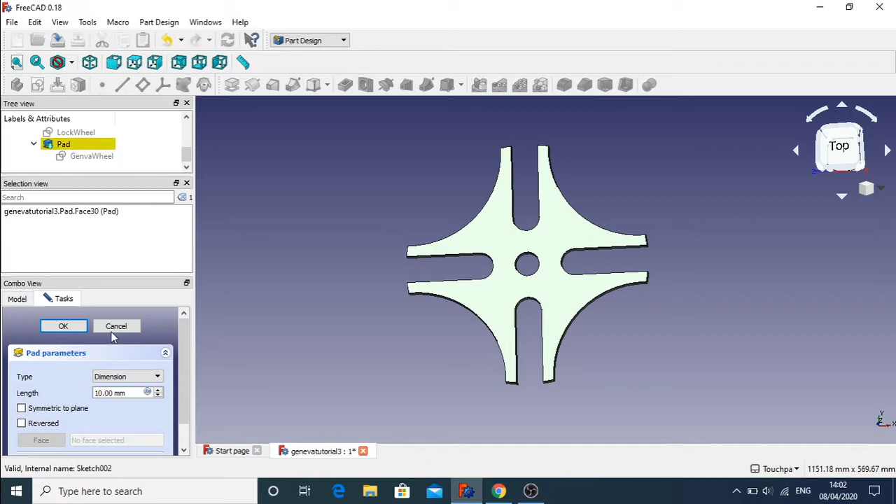To do this, we need to come out of the padding, so we cancel off our padding and jump into our Geneva Wheel sketch, which is part of the padding. We can see this is all complete now. So our lock wheel will actually sit here, and surrounding it will be the pinwheel. So let's jump to our lock wheel.

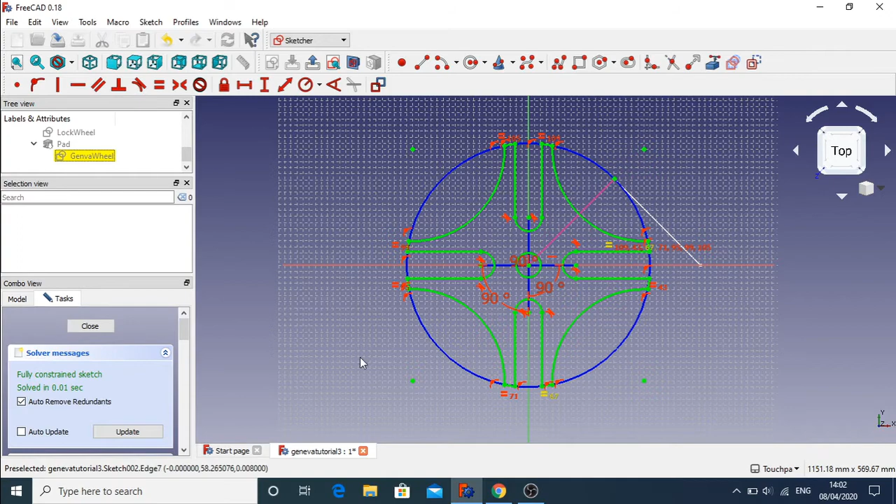What I want to do is make the Geneva Wheel, the actual Maltese cross, visible itself. So we right click on the Geneva Wheel and toggle visibility. We can see these are sitting together with each other now.

First thing I'm going to do is hide some of these constraints on the screen so we can see what we're doing. Let's put down to constraints and we'll just make those invisible. Now we've got a nice clean model on the screen. We can see our guides behind, our lock wheel and our Geneva wheel. So now I'm going to create a new sketch and make the pinwheel.

And I'm going to exit the sketcher. Now the lock wheel has become invisible again, so I'm going to right click, click on there, go to my model and look at visibility, and set that one to true.

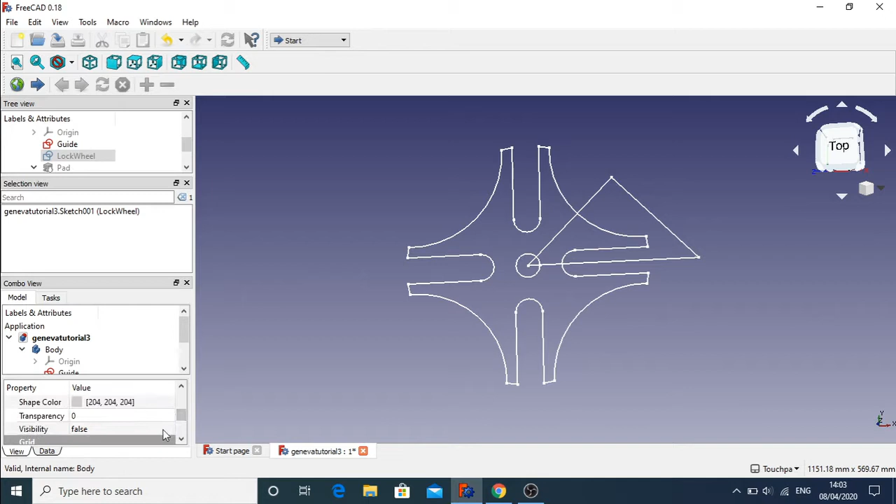Jump back into the part designer, and I am going to make sure that I'm actually within the body. Click on the body, there we go, click on the body and then create sketch. And this is what I'm looking for. So XY plane, click OK.

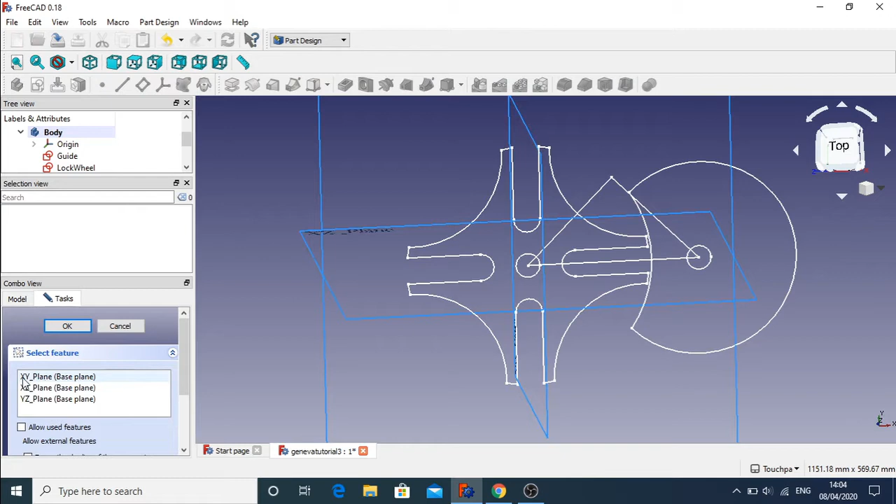So now we've got a new sketch going. You can see down here sketch 003. And I am going to rename this as pinwheel.

And I'm going to create a circle on here. Now my circle's got to be 200mm wide, which was the same size as the Geneva Wheel or Maltese cross. For the time being, I'm calling this the Maltese cross.

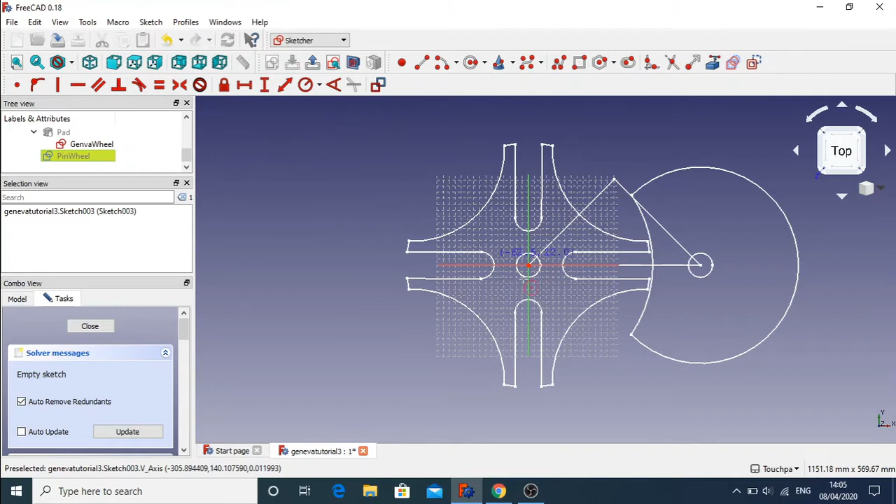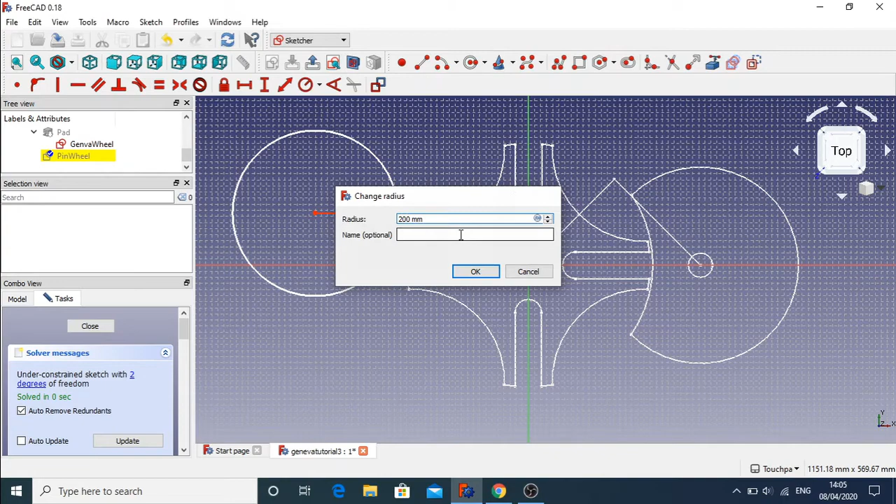So create our circle, and then click on the circle and go to constrain an arc or a circle. And we can change the radius of this to 200mm.

And I'm going to pull this over to the center, or close to the center, and I'm going to click on the create an edge link to external geometry, and I'm going to bring in the side of my triangle that you see here, my guide triangle. So I'm going to bring this in, and that will bring in this point that I can constrain this geometry to. Hit escape. We'll just move our circle into place, click on the 2 points, making sure 2 vertices are selected here.

And hit the constraint point tool here. So that's constrained to the center, and now we've got the circle sitting there. So this is part of our pinwheel.

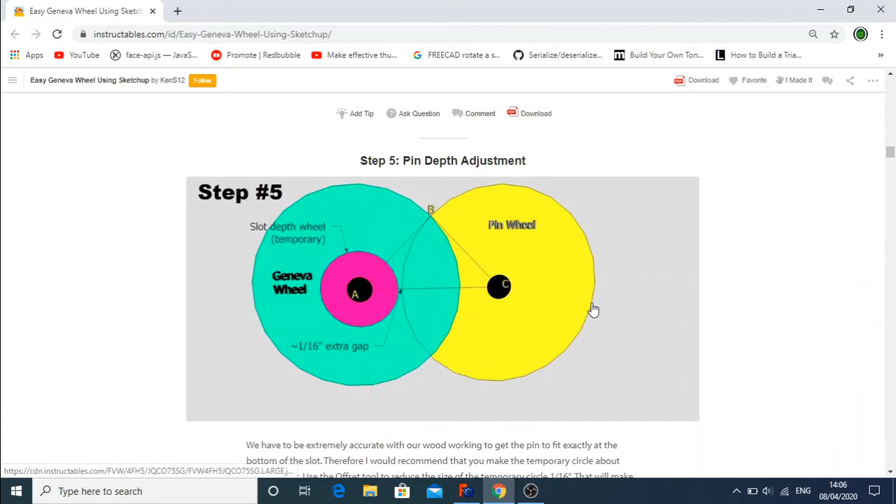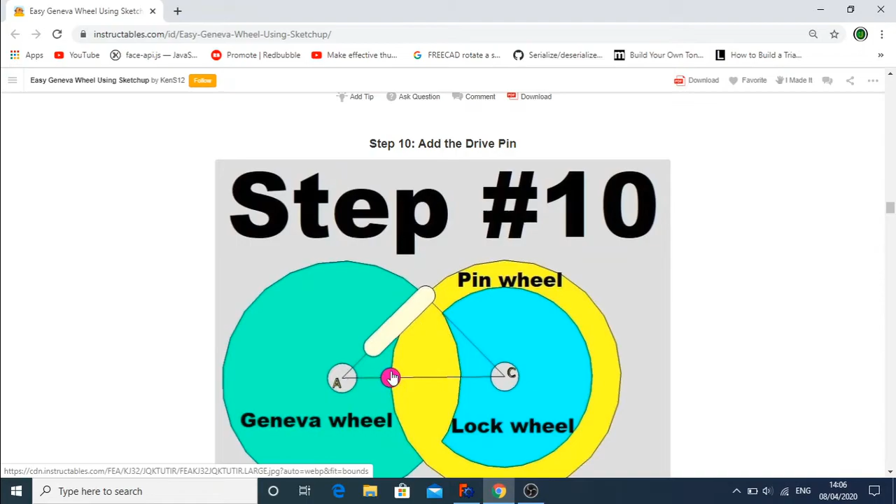Now if we jump back to the instructions, see our pinwheel sitting here. And we've moved down to around about, I think it's step 10. You can actually see where we're placing the actual pin itself, because the pin has got to sit inside here, and we've been making all the sizes of our holes exactly the same.

All our sizes of our holes are the same, and our pin will be the same as well, so it will actually sit inside this slot here. So we'll do that now.

And we'll create a circle, and we'll set the constraint on the radius and 20mm. So that looks about right. So that will sit in here.

And that's got to be right on the edge of the pin wheel we've added. So we look back at our instructions, we can see that this sits on the actual edge of this pinwheel. This pinwheel will be increased in size, so it will actually take up the space, so we can actually mount the pinwheel, the pin itself. Otherwise, we wouldn't have anything to actually mount this to.

So we go back to our FreeCAD, and I'm going to click in the center of this pin, and I'm going to move it into position around about there, and I'm going to click on the circle. Now it doesn't look like it's in position, but I just want to attach it to the circle first.

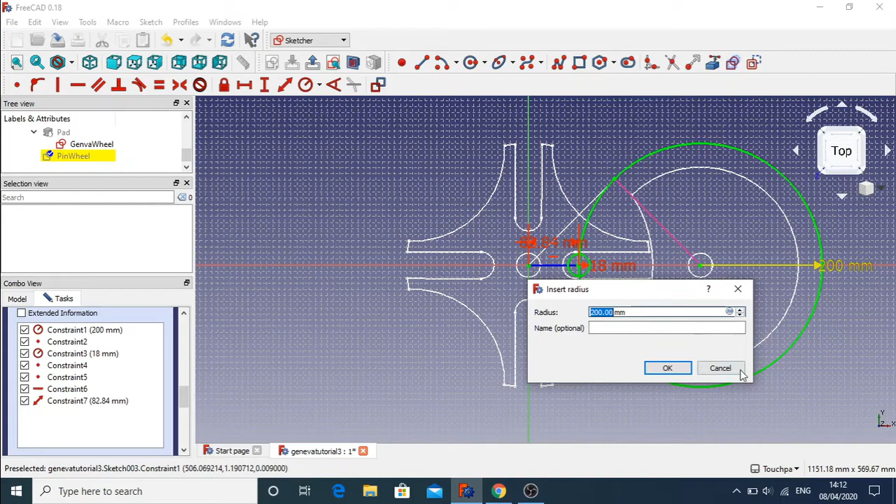So I can either do one of two things: I can actually increase the radius here, or I can click on the radius and delete it and do this by hand, which may be the better way of doing it. So I'm just going to increase it to about halfway between the hole of the Geneva wheel and the pin itself.

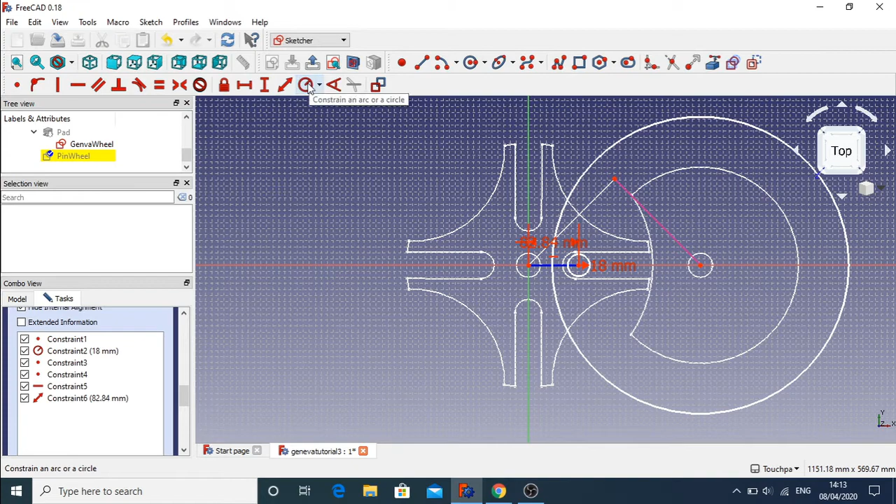And then I'm going to lock that diameter in using the constrain an arc or circle constraint. It's 243, I'm going to make this 245. Now that's nicely constrained.

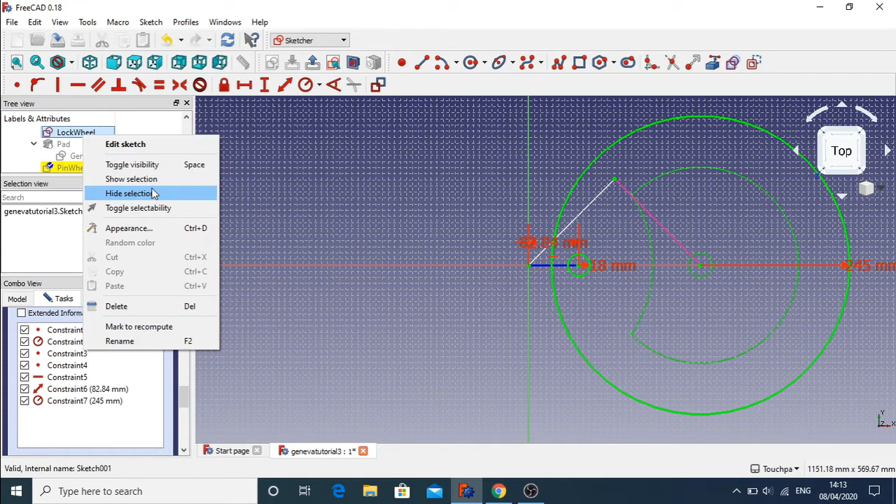Make the visibility of my Geneva wheel hidden. I can make the visibility of my lock wheel hidden. So now I'm just dealing with the pin wheel itself.

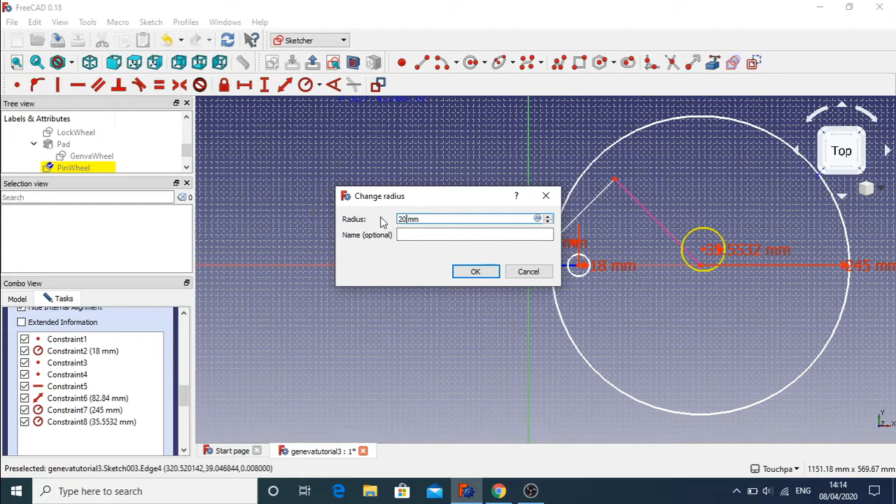One thing that I've missed is the actual hole in the center, so I'm going to fix that. Click on my circle. I'm going to add the circle for the hole, and I know all the holes in this are 20mm in radius, so the radius is 20mm, and I'm going to constrain that to the center.

And I believe that should be it for the lock wheel. Sorry, the pinwheel.

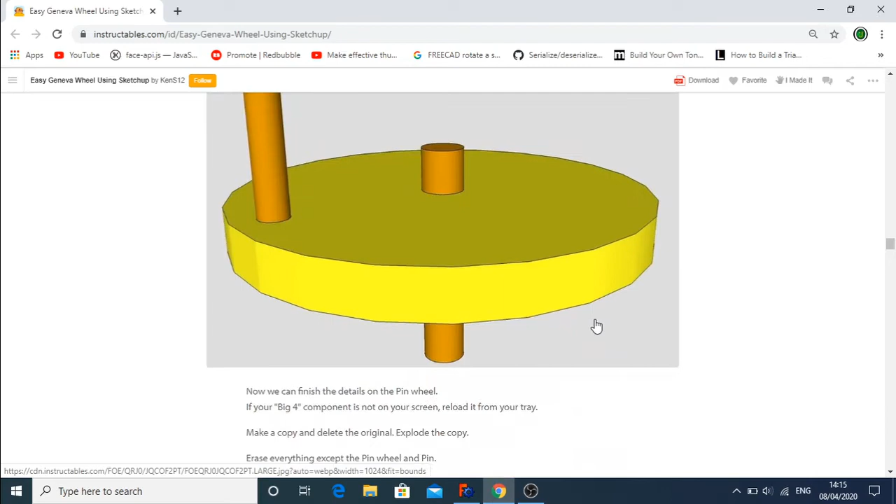It certainly is. So the next step is we've got construction, but we're just going to go back to our lock wheel and make sure everything on here actually allows us to pad. Now, one thing that we're going to get is this 18mm hole here.

So this 18mm pin here is going to end up as a hole, because I'll just place this in as a circle. So what I'm going to do is replace this with a guide, because when I go and pad this, there'll be two holes here. I can show you that now.

So on our pinwheel, we close and hit pad. You can see that we've got two holes, which we don't want. So cancel out of that.

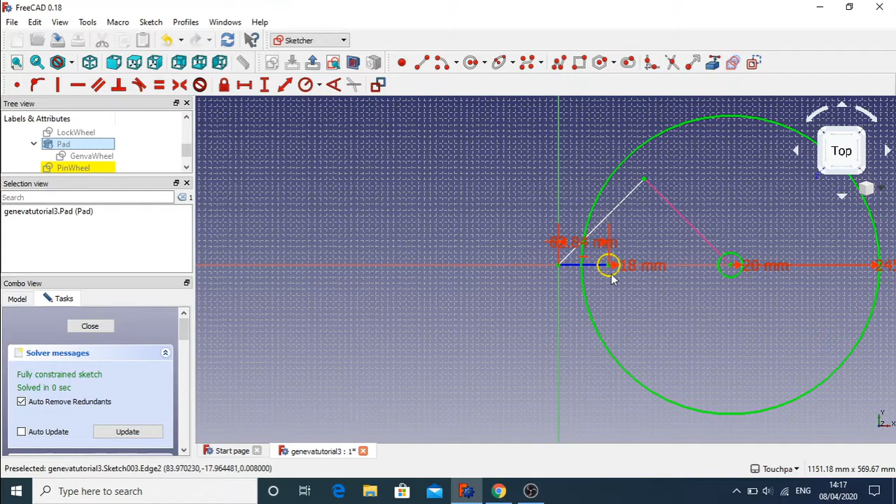Double click on our pinwheel again, and what we're going to do is hide the Geneva wheel selection, hide the pad, and I am going to remove the 18mm wheel.

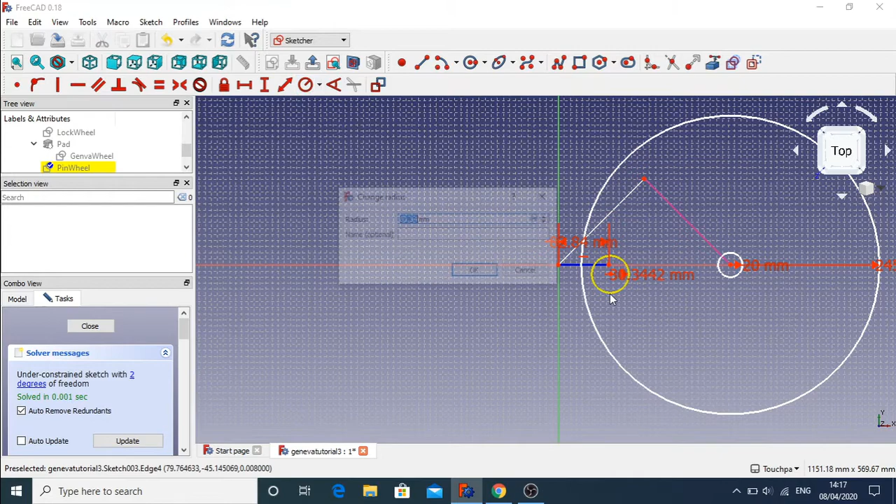I've still got the point here, so I can know where to place it, and I'm going to swap over into construction mode and add some construction geometry here and set the radius back to 18mm.

Now I may place a little hole in here so I can actually get a screw through, so I can connect this to the correct place. So I'm going to jump out of construction mode.

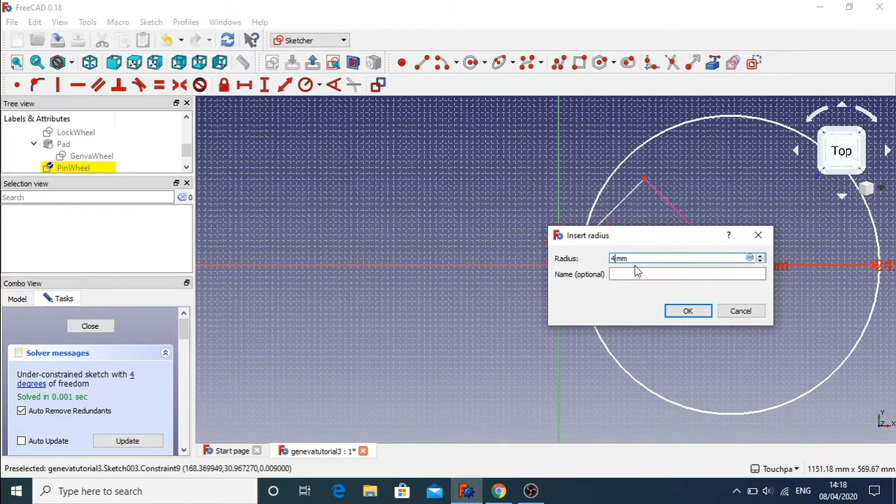I could have done this before, but I've just decided now. So I'm going to make a small circle. I'm going to constrain the radius of this circle to about 4mm. There we go, so we've got a small circle there.

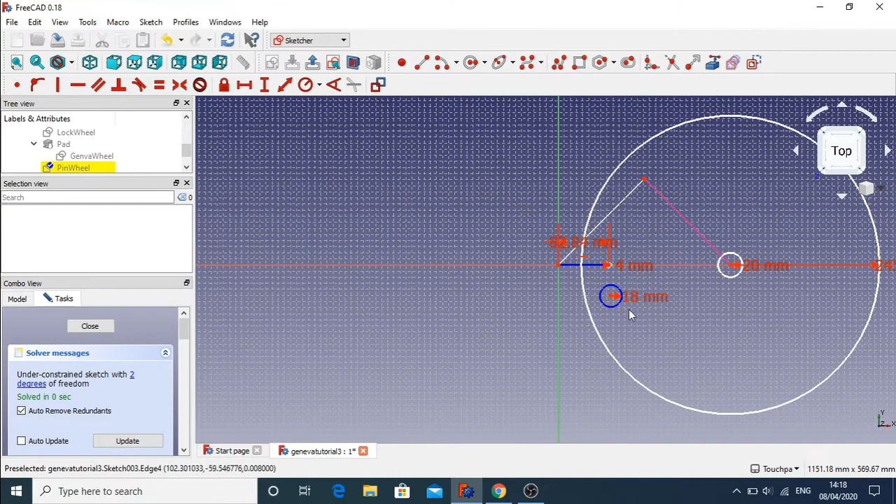And I am going to constrain it to that centre. So we've got a small hole that we can thread a bolt or a screw in, so we can fix this, the 18mm pin to it, and I'm just going to constrain the 18mm guide there as well, which won't appear on the pad.

So close. Let's go to our pinwheel and just pad it to have a look at what it looks like. So there we go, we've padded this, and we can see that small hole for the bolt to put our pin on, and the hole for the actual mounting itself.

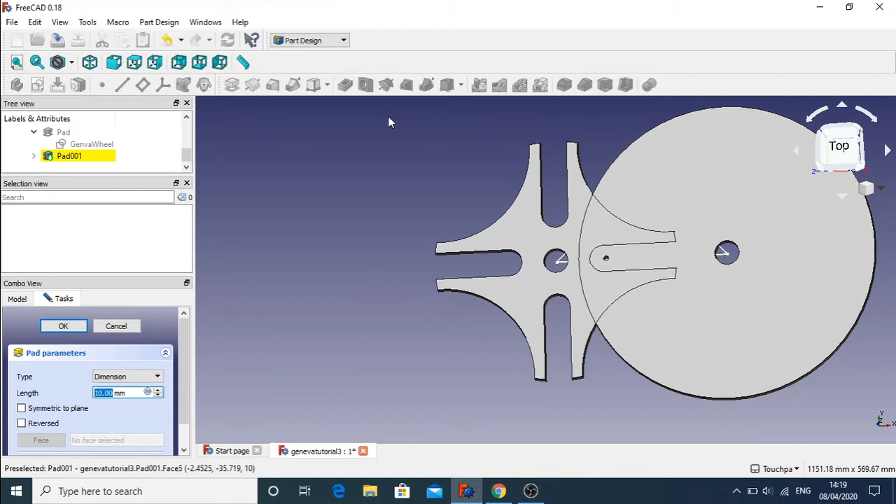Let's cancel out there, and I'm going to have a look at what we've got here. So we've got our lock wheel, which I'm going to make visible.

So right click, toggle visibility. We've got our guide, which now I can either get rid of or make invisible. We've got our pinwheel and, in here, our Geneva wheel, which has already been padded.

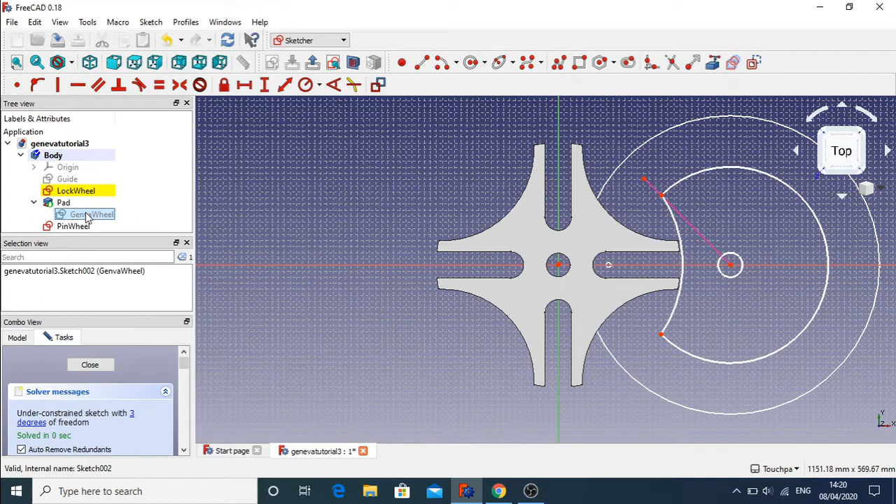Now we've completed the individual components, we've got a small problem. Because this is all set in one body, we're going to have a problem with padding. As you can see, I've only done one padding, I've cancelled all the others, and our lock wheel and pinwheel still need to be padded.

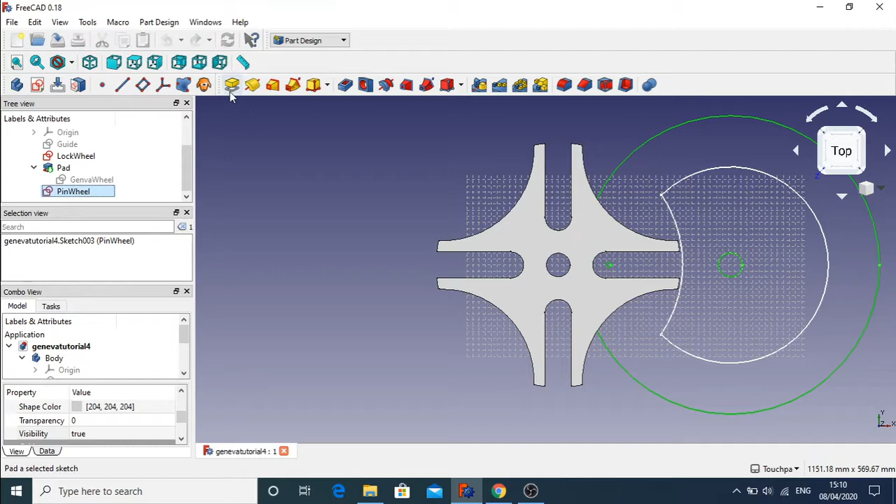So if I click on my pinwheel and hit pad, click OK, and then click on the lock wheel and hit pad, click OK.

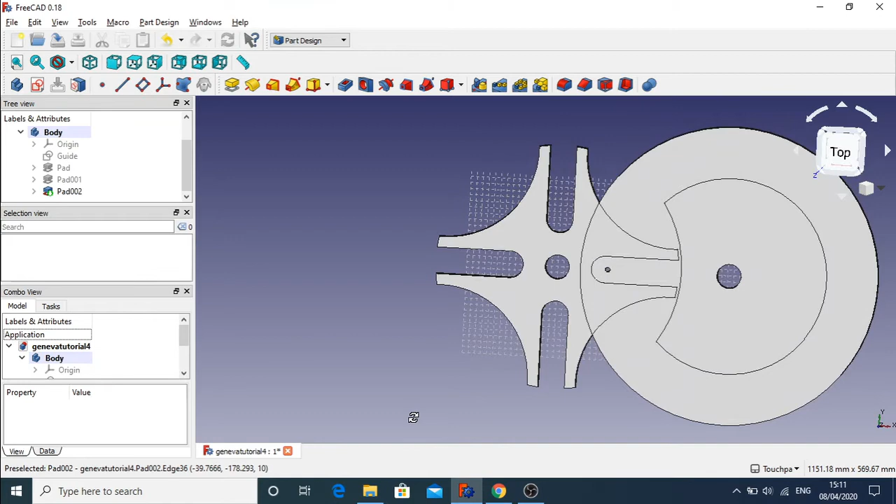What I now have is a single piece of geometry that has been basically joined together. These are not separate parts. So I want to undo the padding there.

I will actually create some distance between these parts now. So I'm going to move this pinwheel over to the left hand side and show you what will happen. So if I double click on the pinwheel...

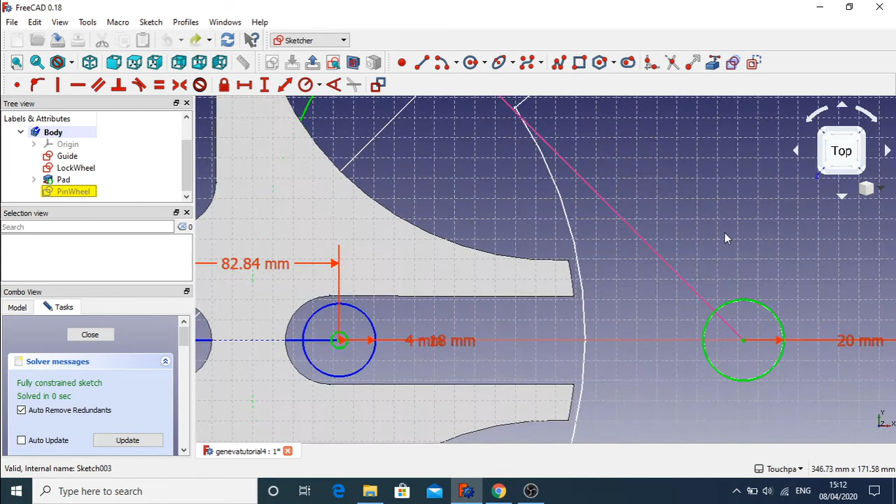And you can see we've got some geometry in here. So the first thing I'm going to do is remove this piece of construction geometry because we no longer need it, and I'm also going to select...

the lock wheel and hide that, and also do the same with the guide itself as well. Actually, the guide won't go away, so the guide has gone, but it's left the side that I've imported in.

So now let's just test this. We can't actually move this at the moment, so what we need to do is remove the constraints from this, and remove this guide here, because there's a constraint attached to this which I don't need anymore, and that's what's stopping me from moving the pinwheel itself.

So if I delete that constraint, if I delete that side there, just highlight and delete. Come on. So you can see it's highlighted there, it's not deleted for some reason. There, now I should be able to move this, which is good.

But I need to keep these two constrained. So the first thing I'm going to do is have a look at the constraint on there. So that's all nice and constrained, two circles.

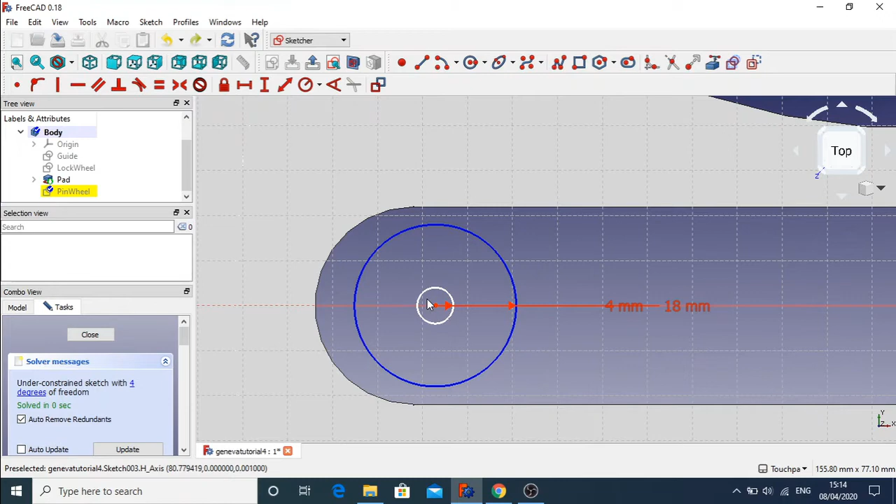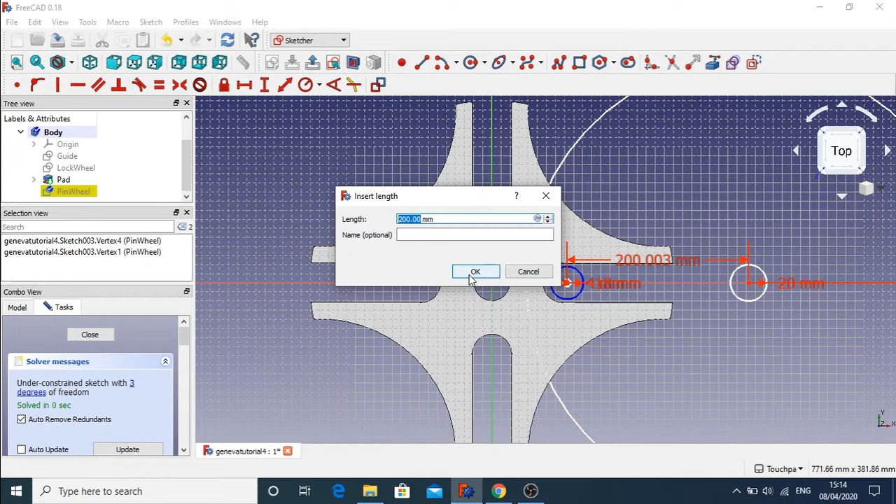So I'm going to highlight the center, zoom out and highlight the center there, and add a distance constraint. That's good, so they'll keep their distance from each other now.

And I'm going to stick a horizontal constraint in there as well, which I need to do on a line actually, so let's escape that. So I'm going to have to add some extra geometry in here, making sure my construction geometry is selected, and add a line.

And I'm going to click on the point constraint here and constrain the centers. Constrain the center, and that's constrained in the center there. Now if I press escape to get my points back, I can add a horizontal constraint to that line as well. So now we should be able to move this without anything moving about, which is good.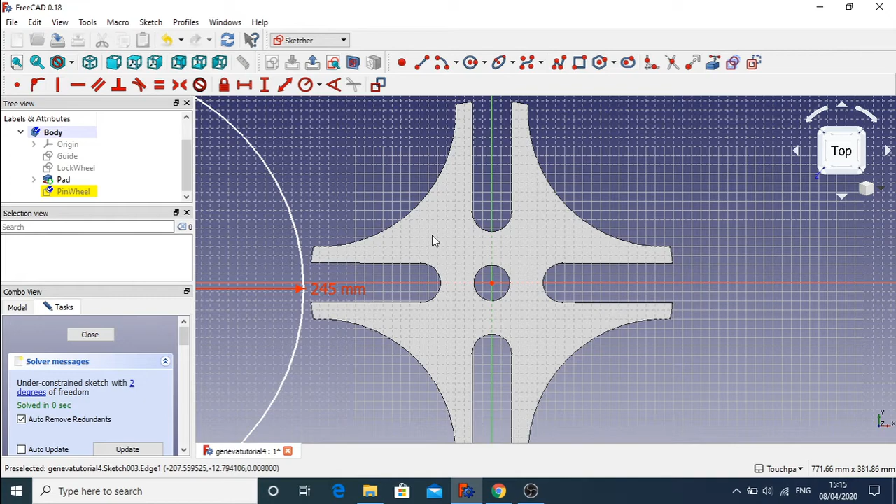So I'm going to move this slightly off to the side, so there's space between the Geneva wheel, or the Maltese cross, and the lock wheel. And I'm going to now...

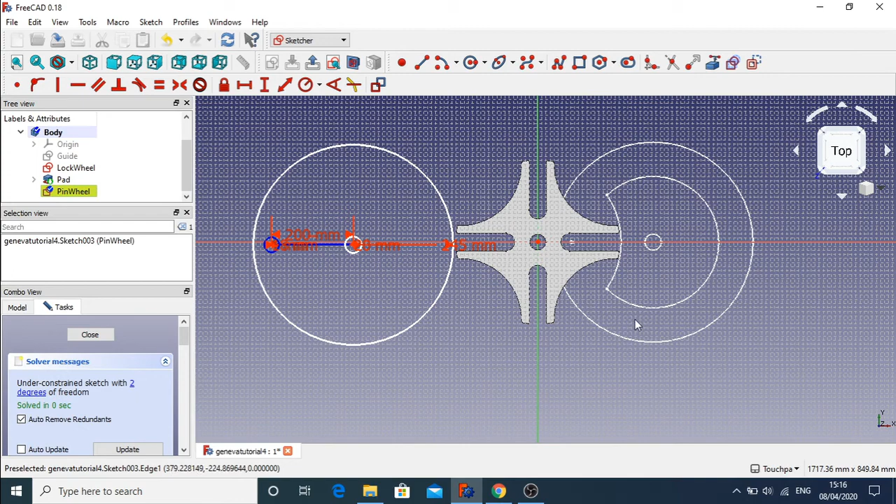toggle visibility on the lock wheel, and also on the pinwheel as well. Toggle visibility. Seems to have shown another lock wheel for some reason there, but I believe when I close that down, there we go, that's no longer there.

So now I should click on the pinwheel. I should be able to pad this, but you can see I'm getting an error coming up. That's because now I've separated the geometry out so they're not touching, and FreeCAD is now dealing with separate geometries.

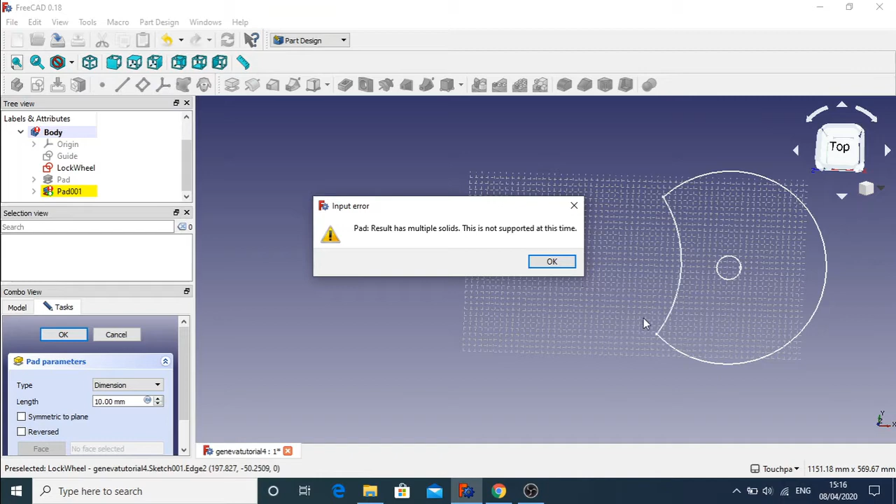So if I click OK there, we get an error saying that pad result has multiple solids. This is not supported at this time. So it tries to create solids out of those geometries, and since they weren't connected, there'll be multiple solids there, which we do want, but it's not supported at this time. So what we need to do, if I cancel out of that, is actually separate out all of these into separate bodies.

So rather than all being one body, they need to be in separate ones. The first thing I'm going to do is rename this body, and I'm going to call this Geneva Wheel, because this will house the Geneva Wheel itself.

And then I'm going to right click, make sure we're in the part designer, right click, no, let's try again, let's click on create new body and make it active. Now this looks weird because it's zoomed right into the center point, so that's better. Right, so body one, I'm going to make this the pinwheel.

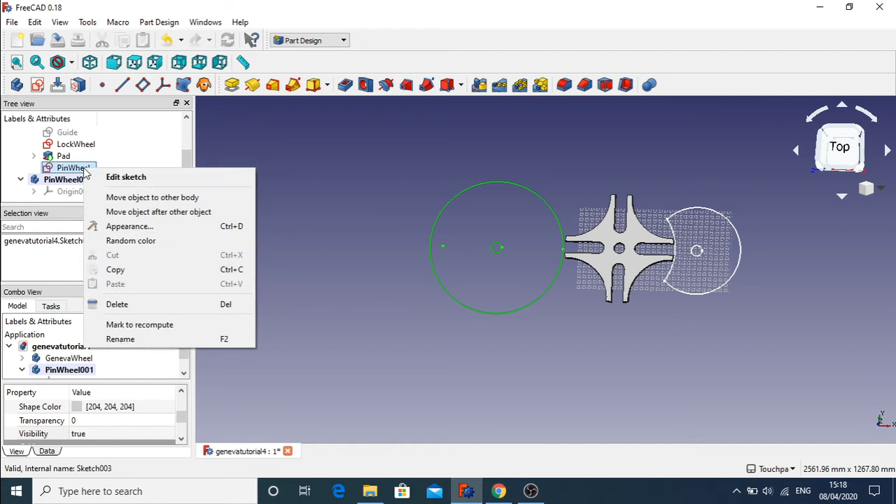And I should be able to take the pinwheel and drop it. No, I can't. Now I should be able to, that's it, right click, move object to other body, and we'll move it to the pinwheel.

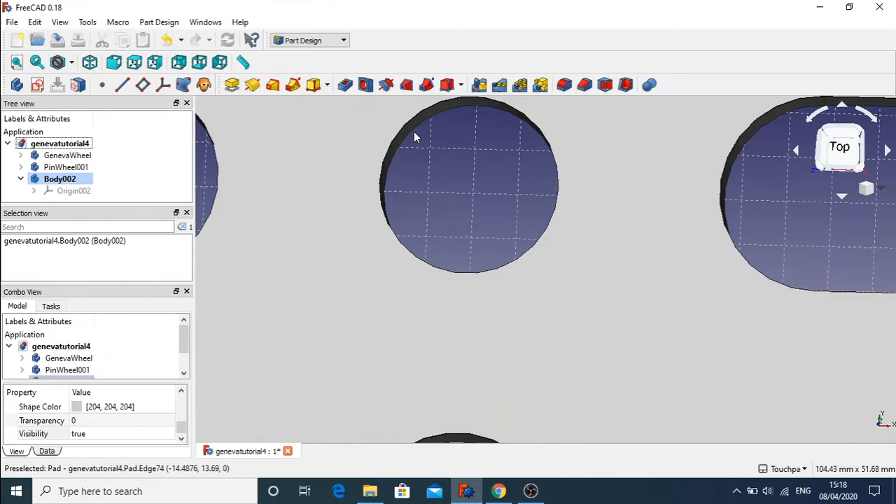And we'll do the same with the lock wheel. So we'll come up to the top, click create a new body and make it active, zoom out, and this one is going to be the lock wheel, so we'll rename this to lock wheel.

And if we open up our Geneva Wheel, should find a lock wheel in there somewhere. There it is. Right click on the lock wheel, move object to other body, and select the lock wheel. So they're all in individual bodies at the moment.

So that's all good. Now what I want to do is bring this together, place them so we can see what they look like when they're constructed. And to do that I need to move this back to the center here of this lock wheel. So move the pinwheel, double click the pinwheel and make sure everything else is visible.

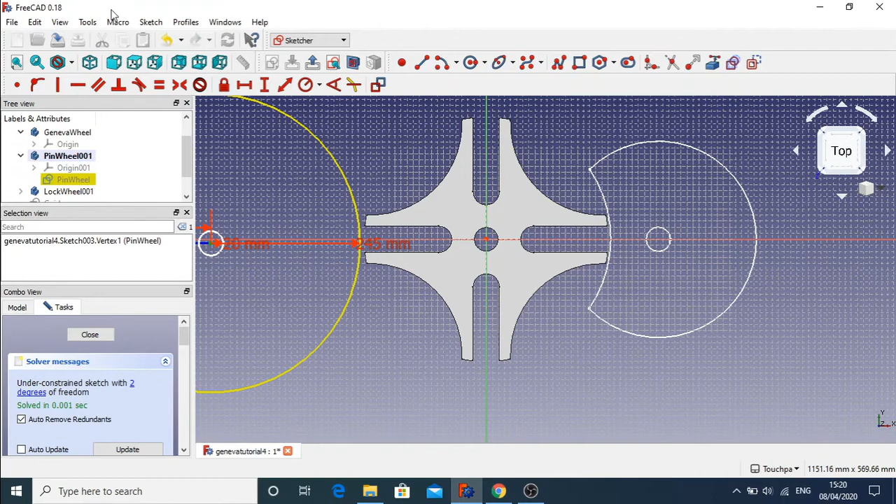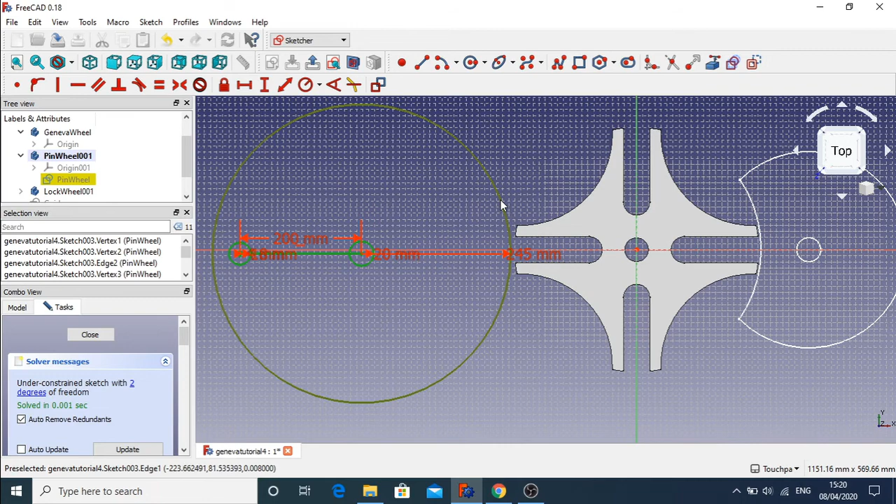No, we're not. First I'm going to select the center of the pinwheel, then go to sketch, sketcher tools, and move. It says the copy requires at least one selected non-external geometry element, so that's not going to work, I've got to actually select this geometry. Sure that outside is selected, and now go to sketch, sketcher tools, and move.

Now I can move it over here, so I'm going to zoom into here, and unfortunately I can't see the center of here, so I'm going to go about rough center there. So let's move that. Oh, that's almost exact. Look at that. We just need final adjustments in there.

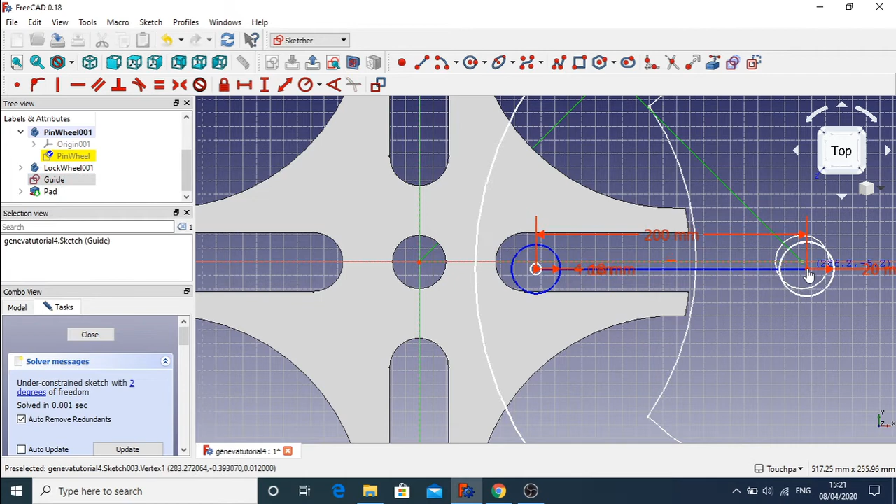This is actually where I need the guide. So let's show this guide, toggle visibility, and just place that over the top of that guide there. I could import this edge back in and anchor it there, but I don't really want to. So that'll do for the time being.

So now all is good. So now we've got the Geneva wheel with nothing in it. What's going on there? Oh, this pad has moved outside of the Geneva wheel. Let's move that back in. Should be able to drag and drop it. That's the Geneva wheel. That's better.

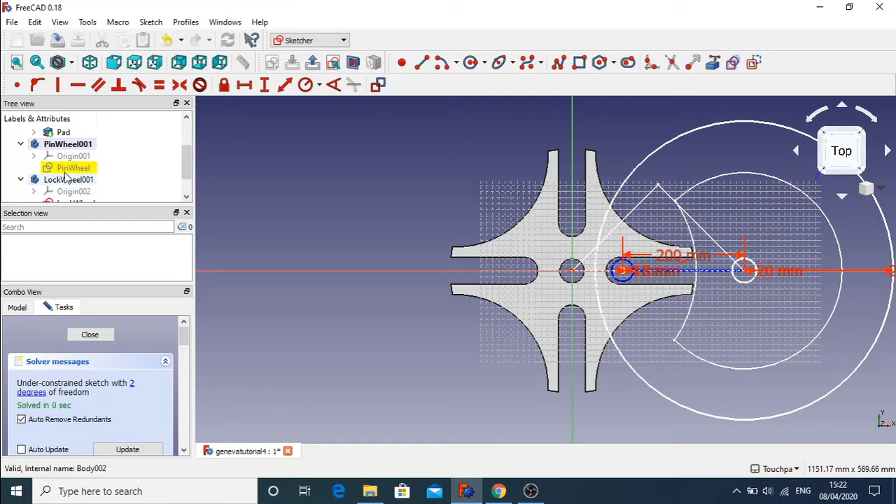So that's all good. So we've closed the sketch, and we've got all those in position. Let's hide the guide again. Go down to here, down to the model, visibility, false.

So let's click on the lock wheel and hit pad. Now there'll be a problem here when I hit pad. It comes up: reference, selected geometries which are not part of the active body, please define how to handle those selections. So what it's telling you is that you've tried to pad something but you haven't made that body active.

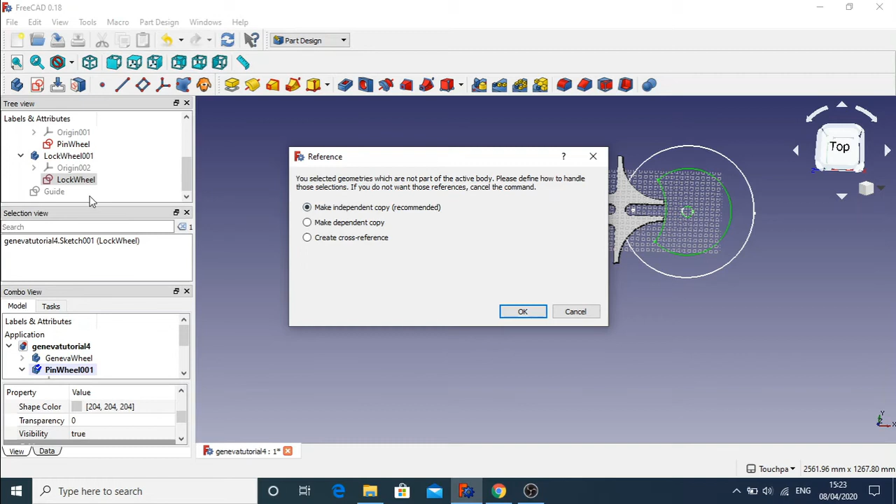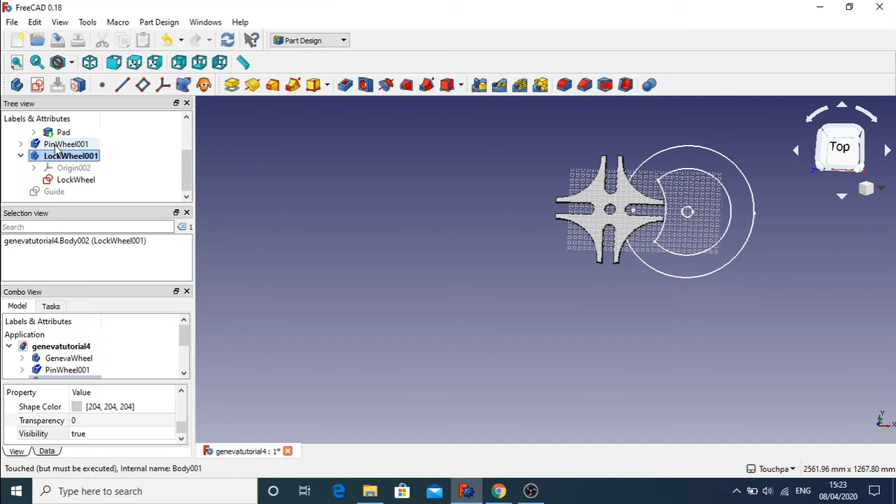If I cancel out of here, you can see which body is active at the moment, which is the pinwheel. So what I need to do is go over to the lock wheel and actually make this active. So I'll right click and toggle active body. Our lock wheel is now active, so our pinwheel has been deactivated. Our lock wheel is now active. So now we can actually pad this, and I'm going to give that 30 millimeters.

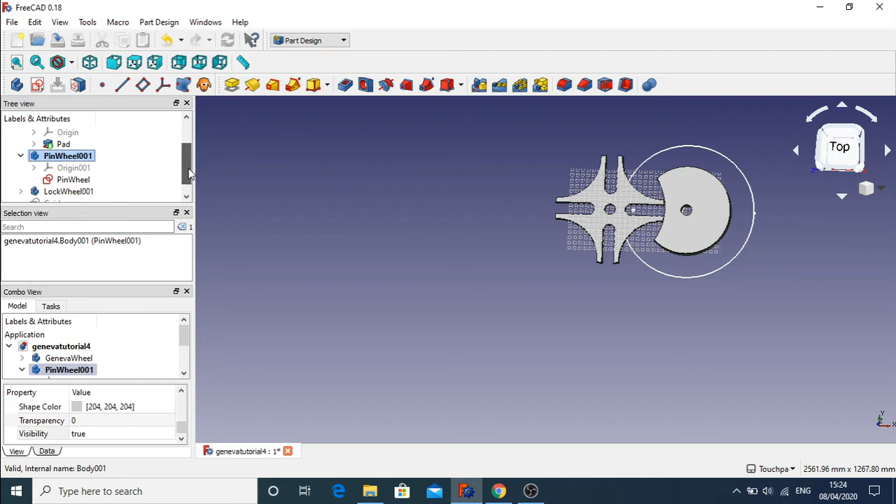And now I'm going to go to the pinwheel. I'm going to do the same. I'm going to right click, toggle active body, so it's now active. And then I'm going to go up to the pad, selected sketch, and I'm going to make this, oh, they're 20 millimeters. Oops.

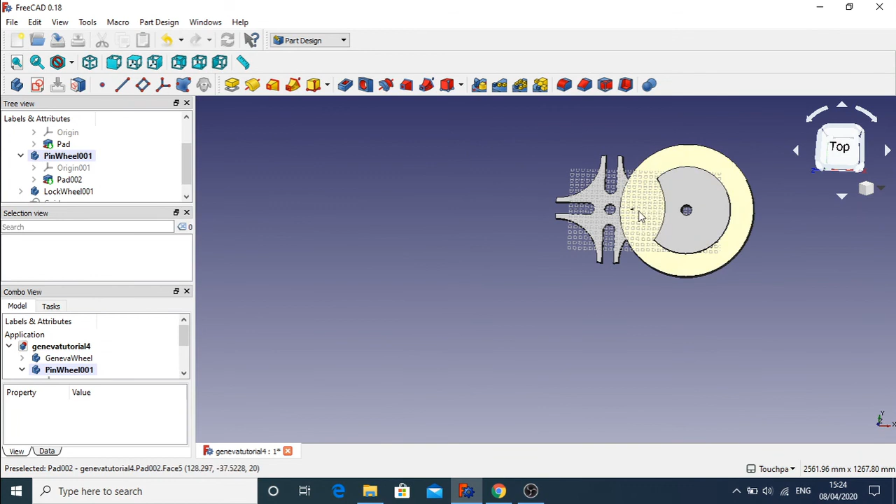There we go. So at the moment, looking at our screen, we can see that our Geneva wheel is supposed to sit on top of the actual lock wheel itself.